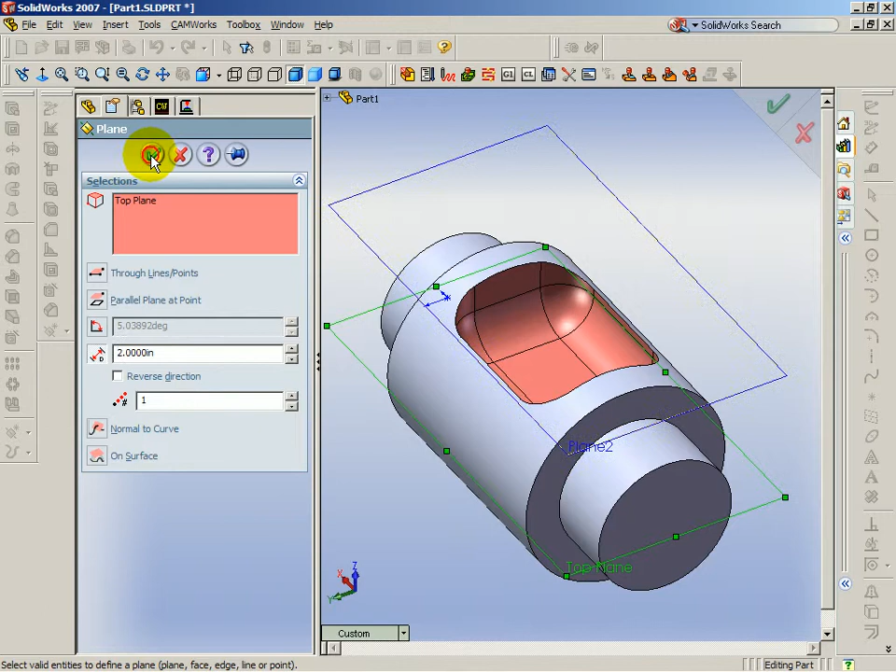To get started on this, we must insert a construction plane above the top of the feature. I'll set this one to 2 inches and select OK. With the plane highlighted, I'm going to insert a sketch. I'm going to hold down the Control key and pick on each edge that we want the 45-degree tapered end mill to come in contact with.

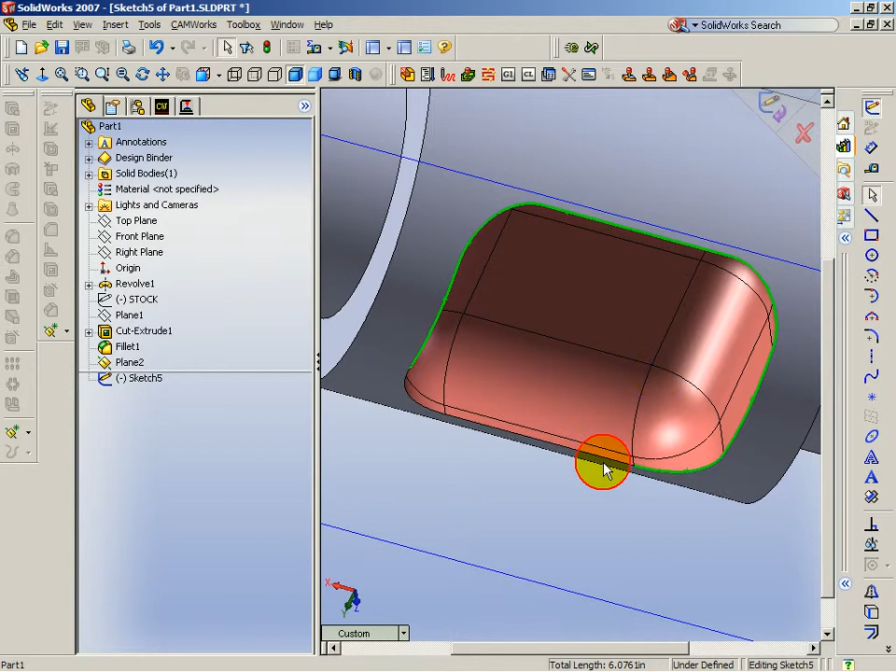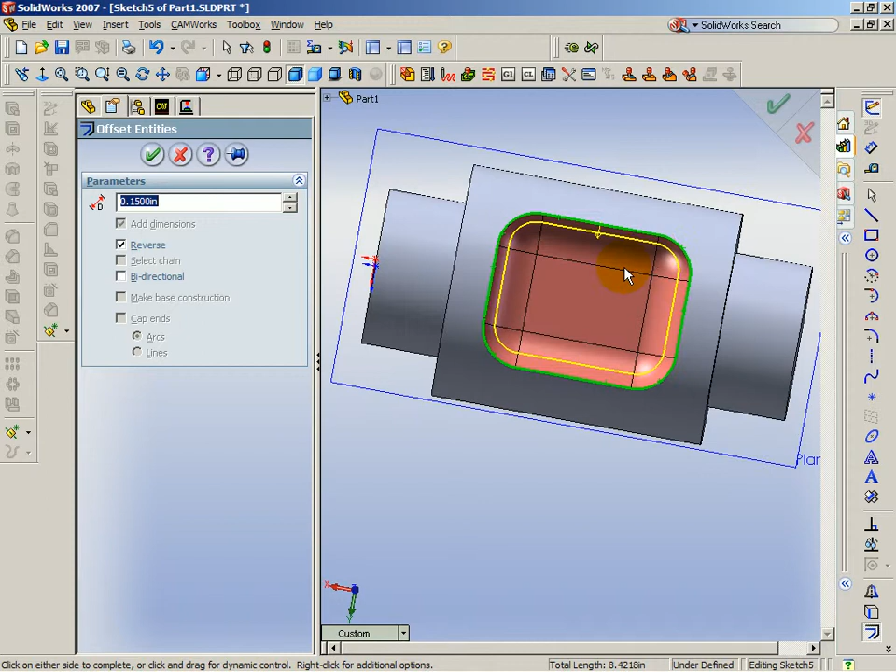Once I do that, I'm going to click on the offset tool and I'm going to set this to 150 thousandths. And I'm going to ensure that the offset sketch gets placed inside this feature or pocket. Here we have our offset sketch.

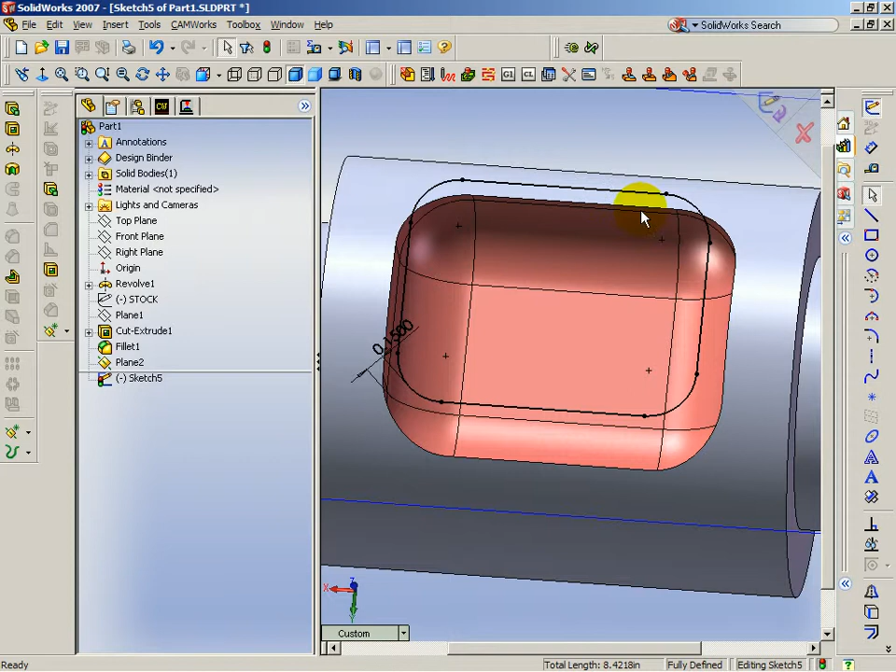The next thing I want to do while I'm in this sketch mode is I want to break one of these lines where I want the toolpath to start and stop. If I don't do this now, CamWorks will start the toolpath wherever it decides to start the toolpath. If this was an open profile, CamWorks would start at one end and end at the other end. But in this case, because it's a pocket, what we want to do is break this line somewhere along here to where we want the toolpath to start and end.

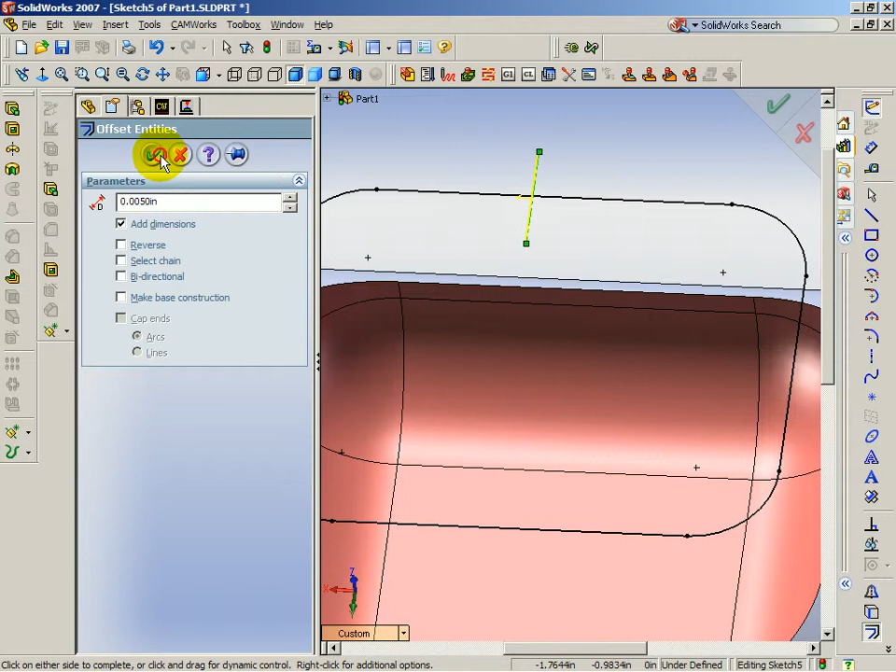So I'm going to zoom in, draw a line across here. I'm going to come down to the offset entities. I'm going to set this to 5 thousandths and then accept that. Then I'm going to zoom in and use my trim tool, split this line and get rid of these 2 lines. Then I'll put in a dimension of 1 thousandths.

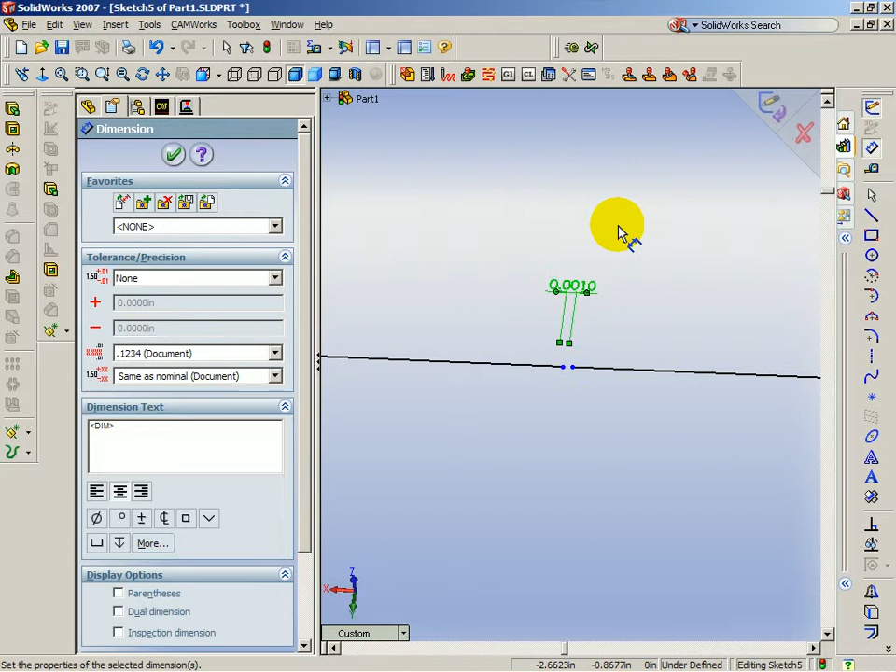You can put in any dimension you want. You don't even have to put a dimension in there. I just decide to do so for better control over the width of that split. So here I have my sketch ready to project onto this part.

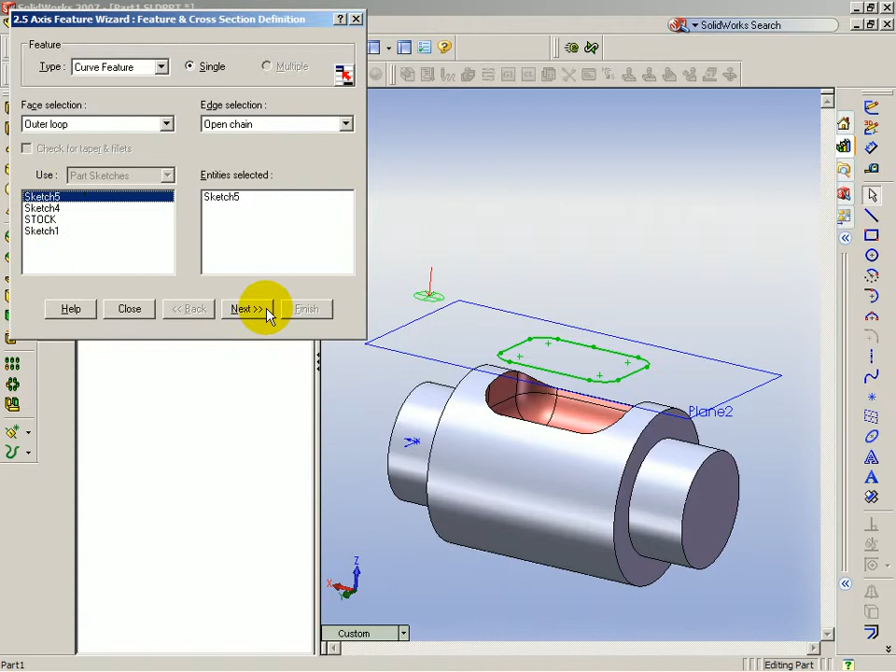The next thing we'll do is go to the CamWorks features tree. Here I have a mill part set up already. It's basically coming down from the top. I'm going to insert a 2.5 axis feature. And the type of feature I want is a curve feature, and I'm going to select sketch number 5. I'm going to select next, and I'm going to set my attribute to 3-axis curve.

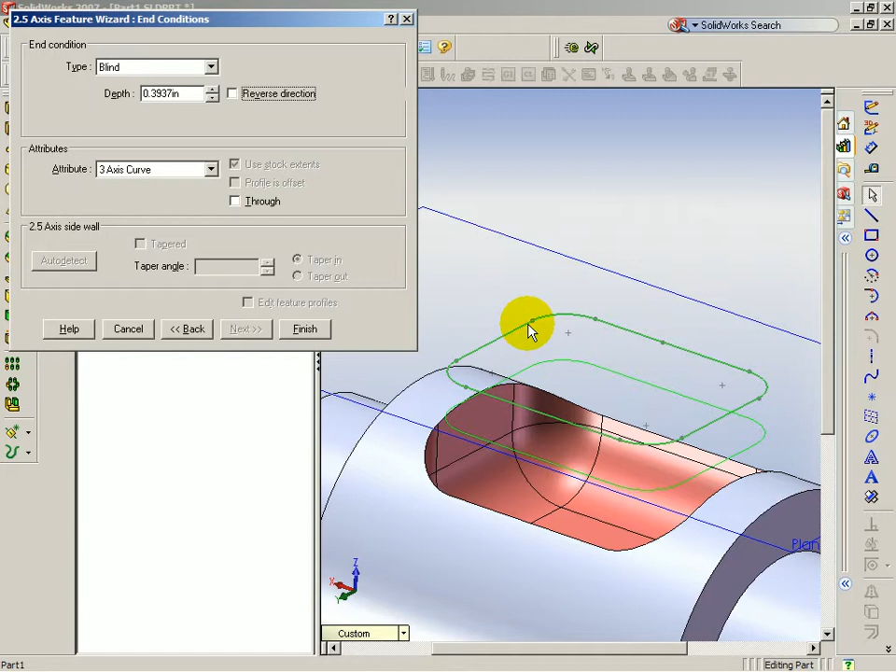This is important. It doesn't matter in this particular situation what the depth of this feature is, as long as it's coming into the part, in the direction of the part. All you're doing is setting direction here. So from the sketch down is the proper direction to project onto this part. So we have that set.

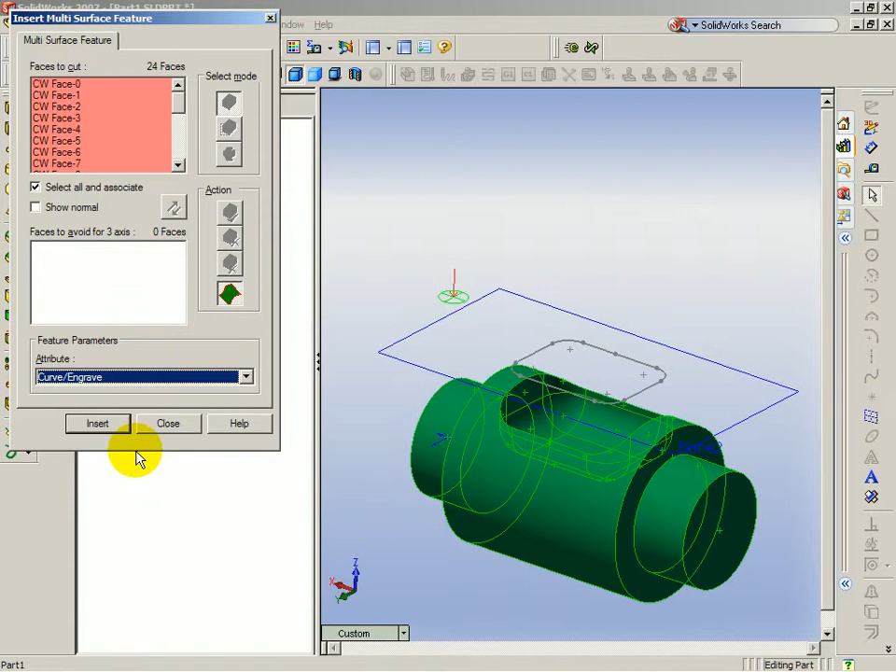The next thing I'll do is right click on the curve feature and I want to insert a multi-surface feature. I'll select all surfaces and come down and select a curve engrave attribute. Select insert and close. In order for us to get this feature to machine with this sketch, we're going to generate an operation plan for the multi-surface feature.

Here we have a curve project operation. In order for this curve project operation to use this sketch, we must add that sketch. We right click on this operation and add an engrave or curve feature. Select add and click OK. Now this curve feature has been added to this operation.

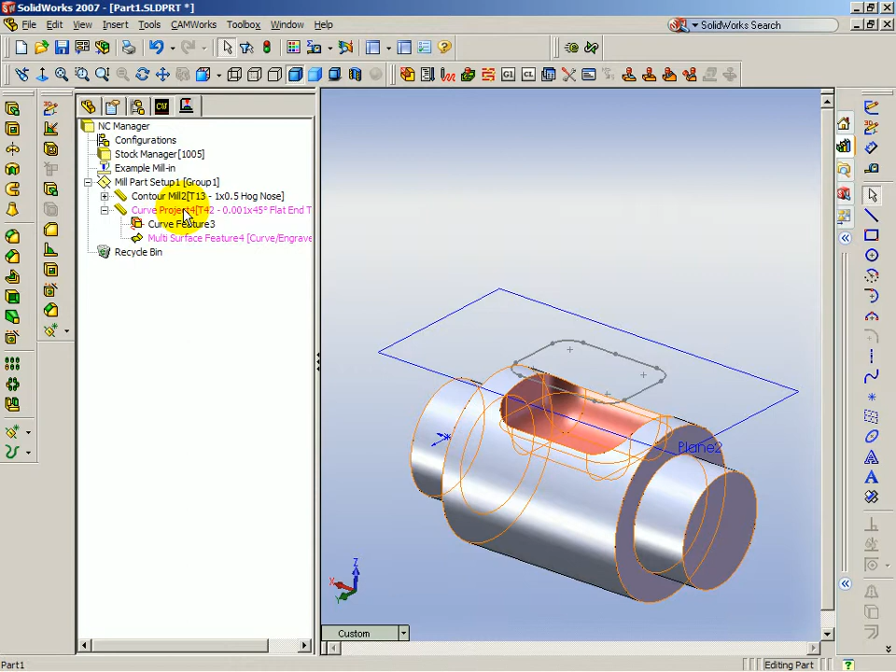At this point, if everything is set up in your operation, which I'll include this file with the video, you can edit this and check out the settings on the parameters of this particular operation. I will right click and generate the toolpath. Now you can see that I have a toolpath coming and going around inside the part following this sketch. The sketch is 2D, but the toolpath is 3D.

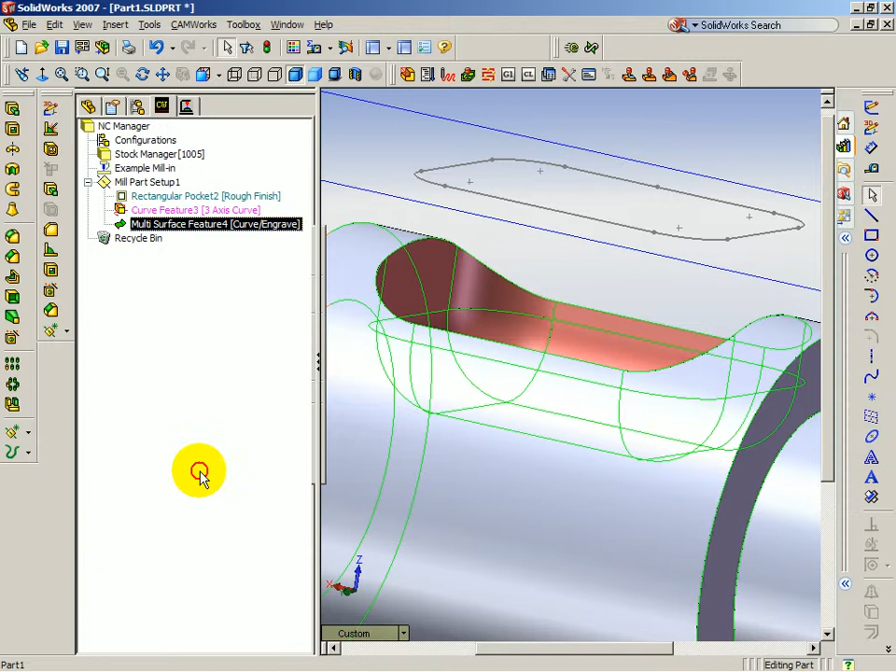I can easily come back and hide the surface feature, hide the sketch, and hide the plane. Now when we come over to the operation, you can see that we have a clean toolpath. But I want to show you that the toolpath is still not cutting the 20 thousandths depth.

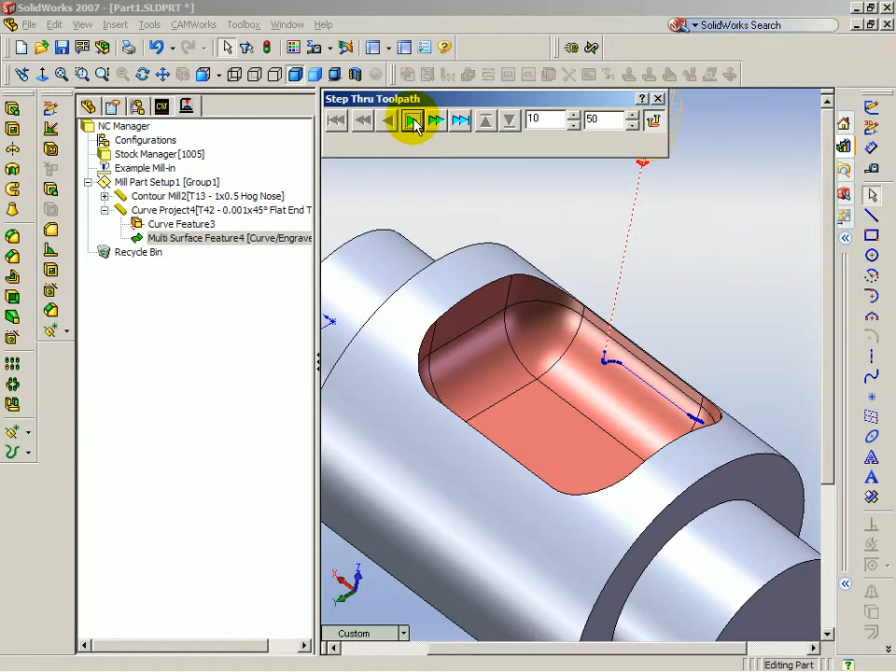If I right-click on this operation and select Step Through Toolpath, and I bring the tool down this far, if we look at the edge of the particular feature, you'll see that this is just tangent with the edge. So therefore I must increase the Z depth of this operation in order to drive the tool 20 thousandths deeper.

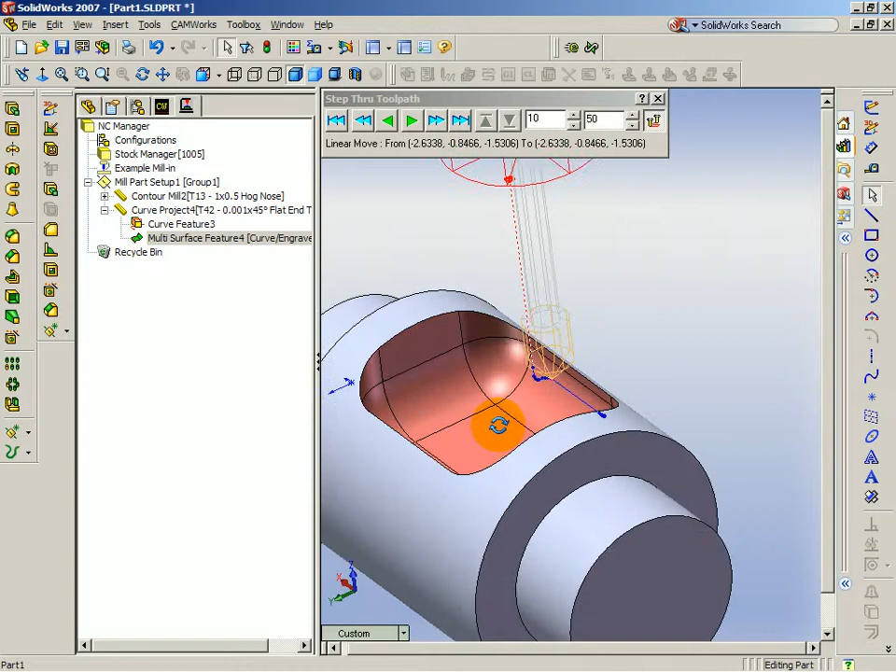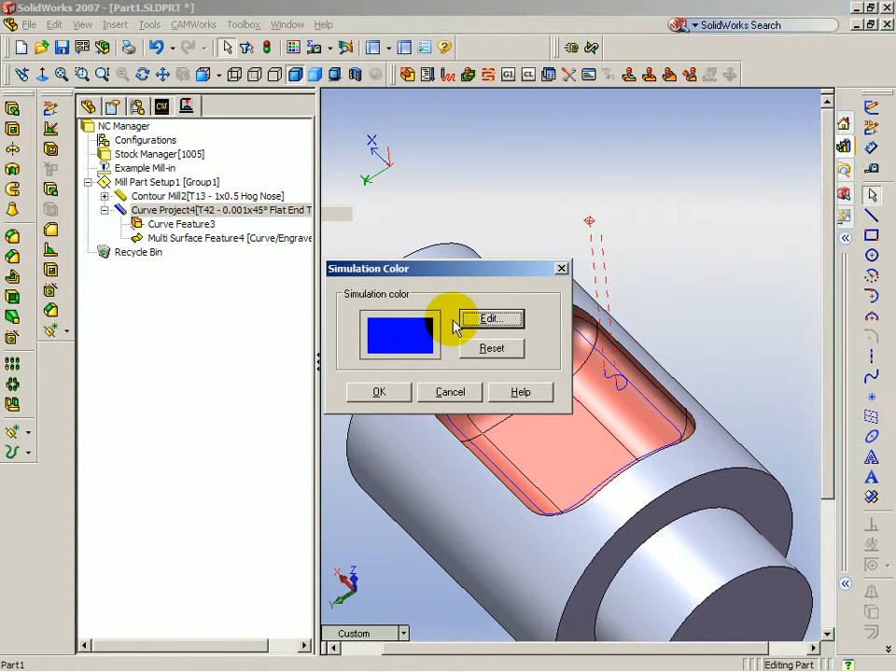So I'll edit the operation, go to Curve Project, and set a negative 20 thousandths. Then I'll click OK and regenerate the toolpath. Once I have the toolpath regenerated, I'm going to go ahead and change the simulation color so that we can see this in the simulation. And we'll go ahead and start the simulation. And here you have your 20 thousandths chamfer on the edges.